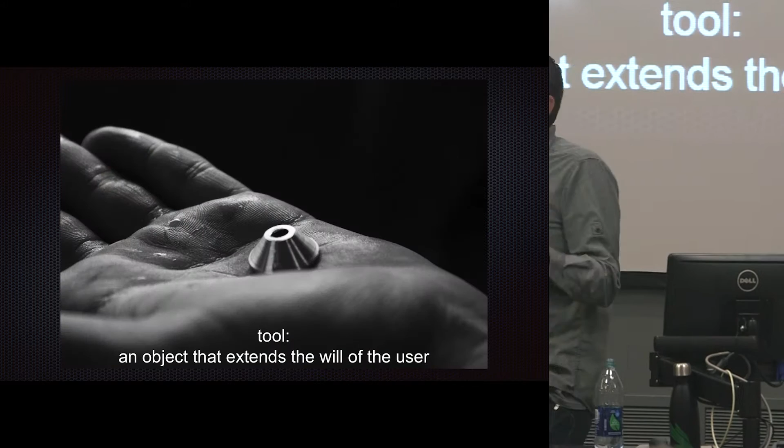Tools are one of those things, and this idea that a tool is an object that extends the will of the user. I've really been interested in how we are surrounded by objects in our daily life, and we consume objects, but yet we're very uncomfortable with making sometimes from scratch. Thinking about, from the very beginning of time, how tools have been used to perform specific tasks has been something I've been thinking about a lot.

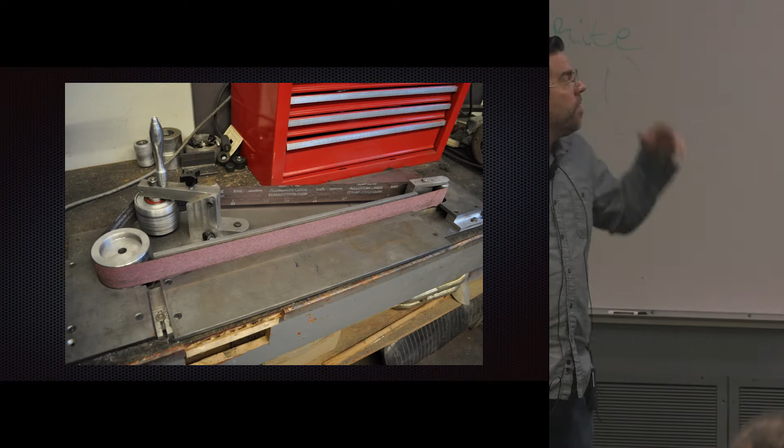This is a belt grinder that I actually created, based off photographs from another belt grinder that was online, and made it so I could sand things with this horizontal sanding belt. I frequently couple my studio practice with making tools. This is another belt grinder that I created.

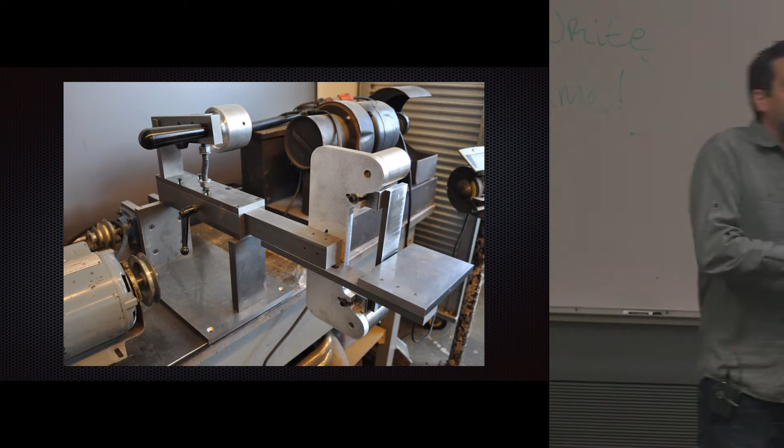Beginning at age 14, I worked full-time in the summer months and then part-time during the academic year on a factory assembly line. I worked in a factory that took raw material in and then created a product, and sometimes you didn't get to be a part of seeing what the end thing was - you were just doing a part of it. I started to realize why my dad would come home and work on things, because he started to own the means of his own production.

I was basically teaching myself how to machine, how to use machining tools, because I had encountered machining at the factory and I was intrigued by, why don't I learn about this in college, in my metals courses?

And then you had to lay on your back and thread it through all these rollers. And if you didn't thread it in the right pattern, the tape machine wouldn't work when you shoved the first box through. But it was like that episode of I Love Lucy.

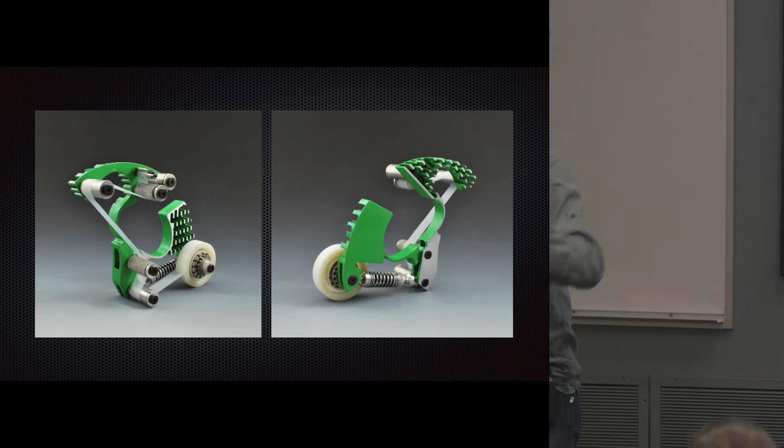When the chocolates are coming down the line and they're eating them and stuffing them, it's like that. And I was like, oh, it's so crazy.

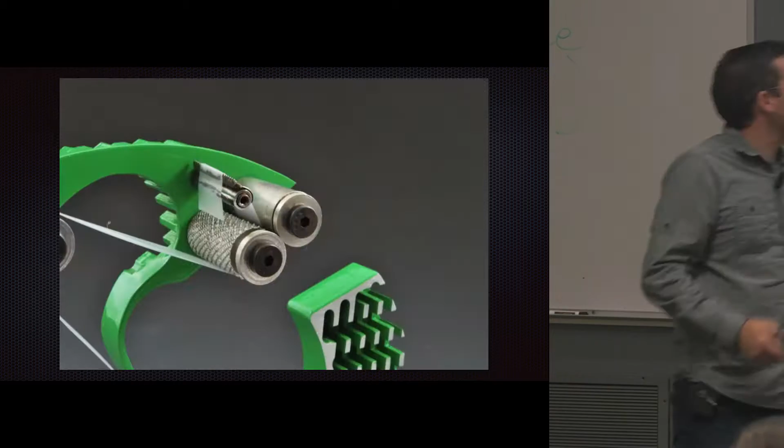And so I thought this idea of making this ridiculous piece of jewelry that also served a second function would be interesting. So I used to hang out in the factory, and I'd go over on my breaks and hang out in the machine shop, and talk to the people there and say, what do you make when you go home?

Because you've got this knowledge that is extensive in how to make things. And they'd scratch their head and go, I don't make anything when I go home, I'm just kind of living for the weekend. And I was like, wow, what a shame. But I started to understand it was because in some ways they had separated what they do during the week with what they do on the weekend.

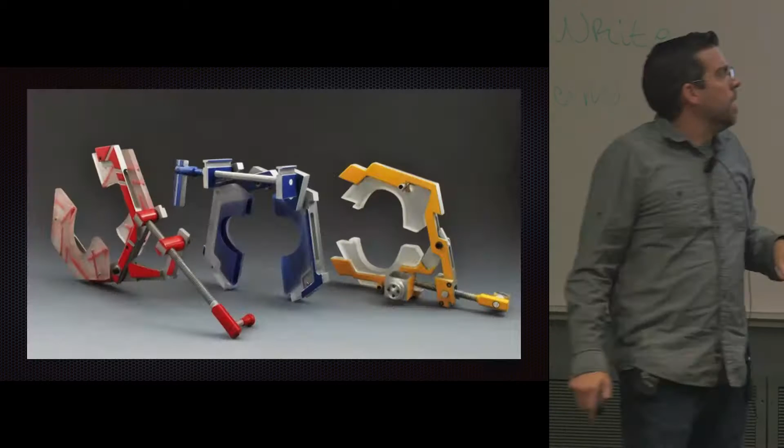So I continued to investigate these self-sizing bracelets, self-sizing jewelry, and started working with other materials like acrylic and aluminum. I was bringing home scrap aluminum from the factory and then remachining it so it didn't have all the dents and scratches, and reusing it.

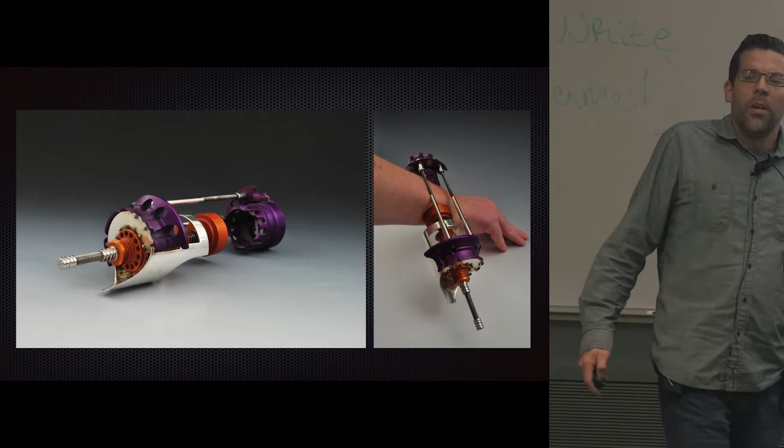And it really culminated in the creation of a lot of work where I was kind of teaching myself a new skill set and not really being reliant upon what I was being taught in class.

And I would take these pieces into the critiques, and people would say, why did you spend all that time making that thing? Why does this object have to be so involved? I couldn't explain it at the time. But eventually, working through graduate school, I was like, why are people so opposed to skill? Why do artists think that if it's skillful, it can't communicate ideas? I was really struggling with that.

That really spurred a whole idea around this: that in some ways the objects we consume are meant for impersonality. The first thing you do when you buy a new cell phone, you probably go purchase a cover, and put a few stickers on it. Or if you get a car, you usually want to put some new rims on it, or a different stereo system, to make it your own.

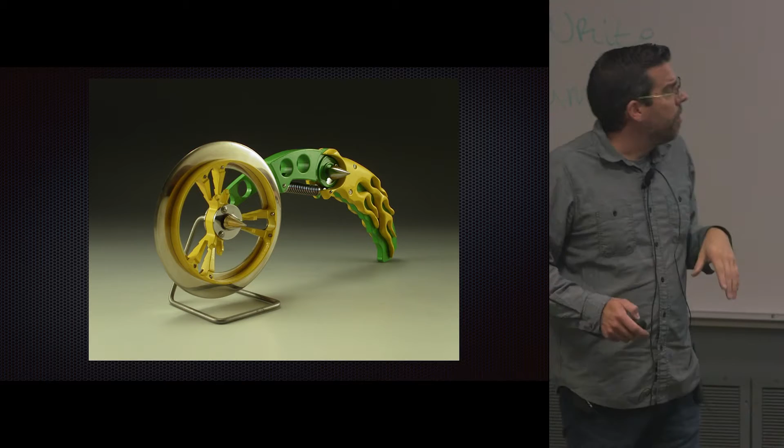This is PFL, Pizza for Life, machined out of aluminum, stainless steel. It's all manually machined. None of this is computer machined. It's literally taking a template, gluing it down on metal, and cutting it out.

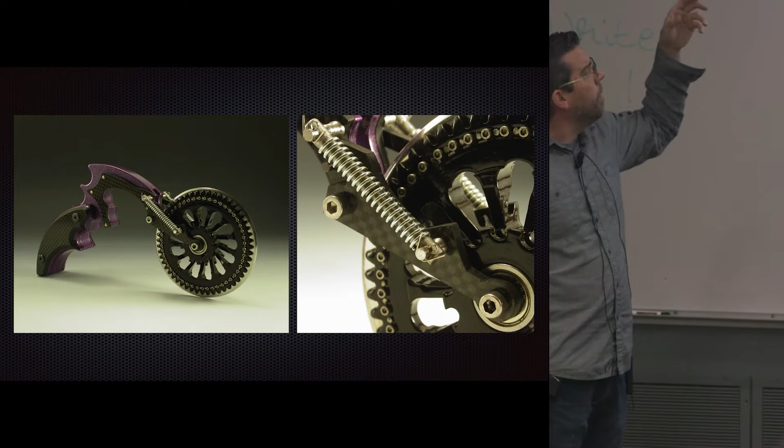And then doing some machine work on the lathe to kind of refine the form. This is Fat Boy. And again, I was really interested in using different materials like carbon fiber and powder coating, and thinking about this over-ornamentation with these like 50 micro bolts on one side and 50 micro bolts on the other to hold the blade on. And this is PFL Mantis.

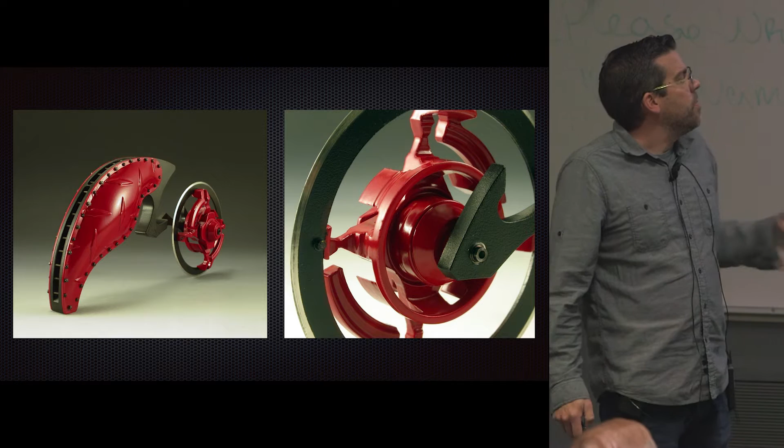And so one of the next pizza cutters I did, this is inspired by a chopper builder in Florida at the time named Billy Lane. A lot of times you'll see industrial designers especially, they'll design objects, vehicles especially, that have a hubless wheel where you can stick your hand through the wheel. And they always look amazing, right? But you never see anybody actually execute one of these designs.

But it was interesting. He took a rotor bearing, or a bearing out of a rotor of a helicopter. He started with that and decided that's going to be my rear wheel, so you could actually see right through the wheel while you're driving it down the road. And I thought, that's really cool. I'd love to make like a hubless pizza cutter.

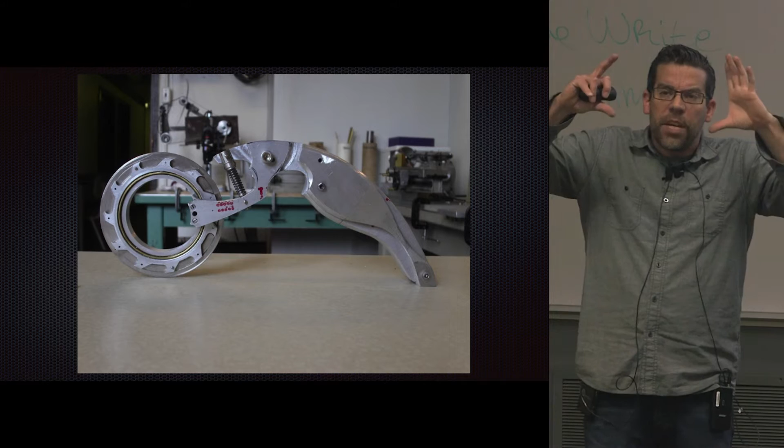And so I found this old bearing that was very thin but large diameter, and I took it apart to figure out how it worked. And then I basically measured the specs on it and reduced it down on my own in raw material to make my own bearing.

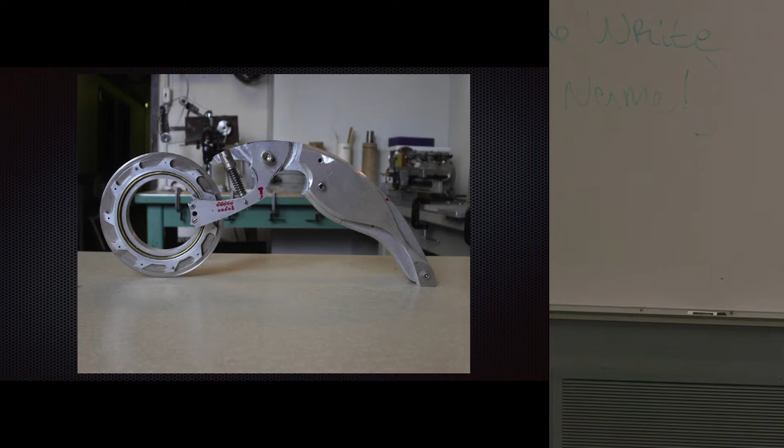So basically there's a little brass ring, and you pop that brass retaining ring, and then you can slide all the bearings on one side, and the inner and the outer race fall apart. And so that became Psycho Pizza Cadillac.

So kind of a response to that Johnny Cash song, right? The one piece at a time brings the car home, and the lunch box. I don't know, I may be showing my age here.

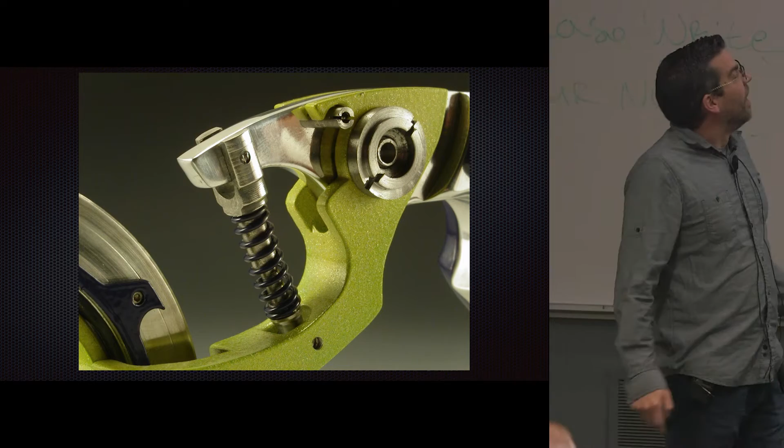So all the pizza cutters have these suspensions, these shocks, and so again, just thinking about how tools and this usefulness grew out of instinct, and again this kind of smashing of conformity. I was really interested in that with the pizza cutters.

A lot of people want to come into the critiques with the pizza cutters. They say, well, you could never use it. I'm like, no, you can use it. Oh, you could never wash it. Yeah, you can wash it. You can totally wash it. But people weren't willing to accept them as functional objects. And I was like, why not? And I realized it's because they're not used to using or seeing something that's truly unique.

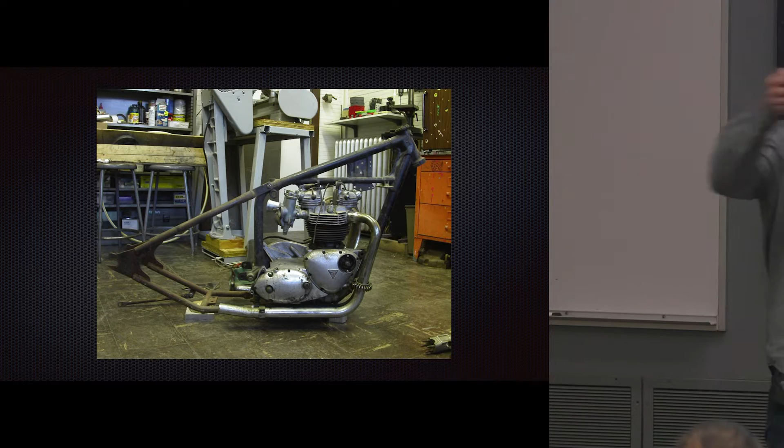So I thought, I've got to build something to go along with that. So I decided I was going to build a chopper motorcycle to kind of bring the relationship together in an exhibition. So I started off with this old Triumph motorcycle, and I made an English wheel.

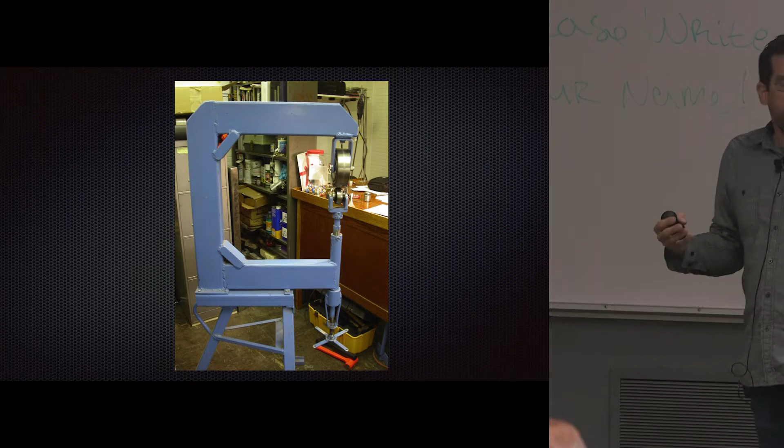This is a tool for rolling metal into compound curves. Panel beaters in England used to use these all the time to make cars. So all your old Jaguars, early Porsches in Germany were hand-hammered aluminum and then rolled to create the shape. And I made it, actually that bearing was out of an old printing press from where my dad worked.

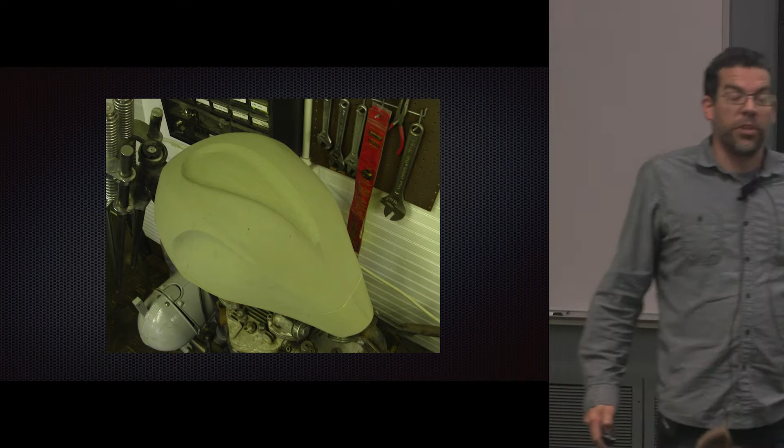And then I made a gas tank, and I took a welding class in this School of Architecture because I really wanted to learn how to weld really well. Because in sculpture it's kind of like, oh, you just stick it together, it's done, right? But I really wanted to learn all about it. So I took this class.

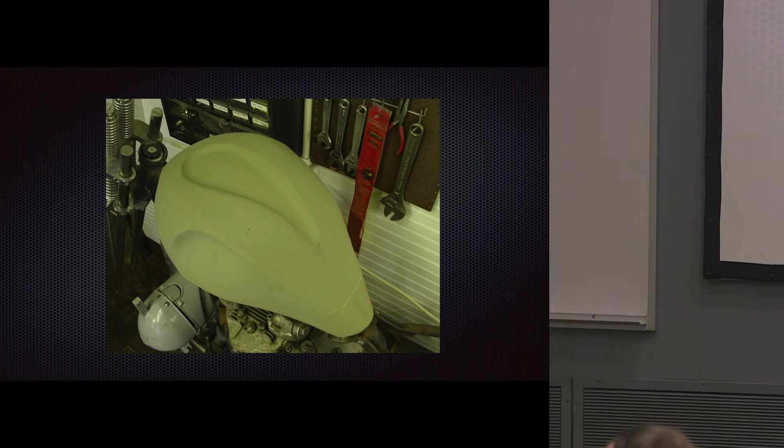I said, if I can build the tank... I think it was about this time of year that I started to build it, and my thesis show was the next semester in March. So I made a leather shot bag, turned a wooden hammer to be able to beat out the shapes, and made templates off of the tank.

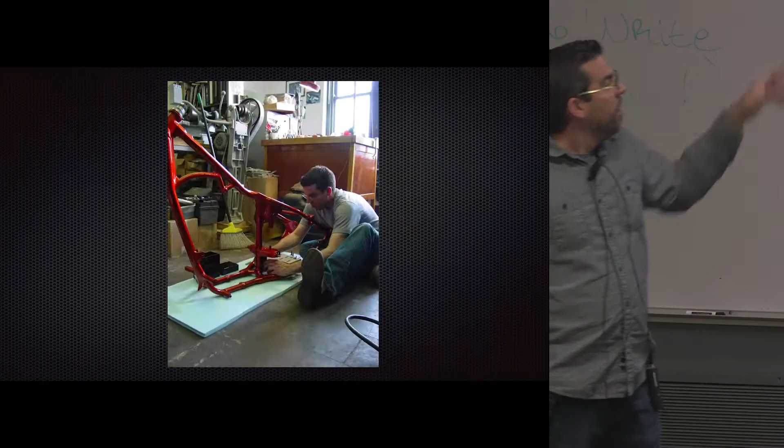I made the gas tank, and I was like, okay, I got this far, I'm going to keep going. I started making the foot pegs, built the Springer front end, the fender, the foot controls, and the pipes, and basically assembled this thing in my studio. Eventually I showed it in my thesis exhibition along with the pizza cutters.

That kind of started this idea of, okay, how do I just teach myself how to do these various things to be able to create what I want to create?

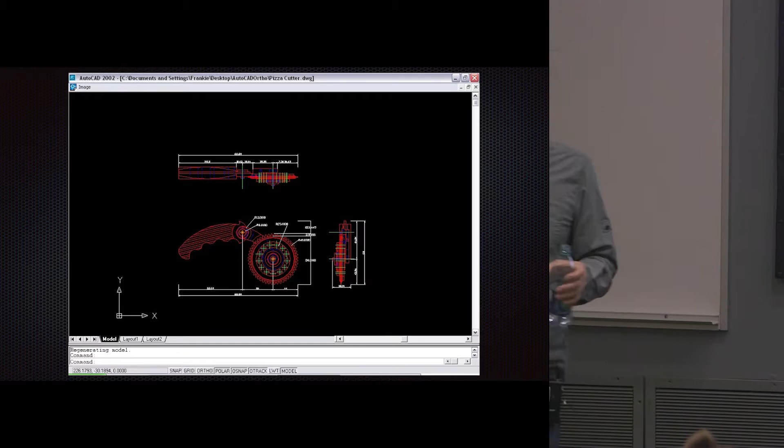While I was in graduate school, I'd taken some classes in CAD. We learned how to use AutoCAD, and I thought this would be a great tool for me to visualize what things look like before I build them. In the beginning, I was just modeling things I'd already made, and I liked that you could duplicate, copy and paste, apply materials and lighting to an object, and animate it. That was cool, and I could see how something was going to function before I built it.

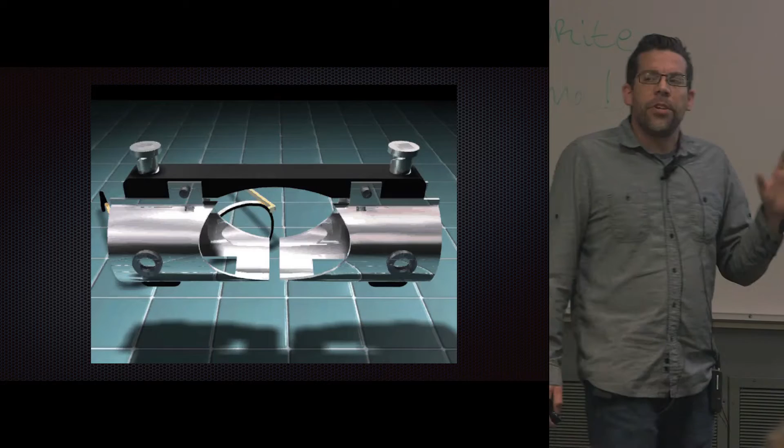I was like, okay, that could really come in handy for me to visualize things before I spend an exorbitant amount of time making them. But at the time, there wasn't much you could do with those digital files, so it went on the back burner for quite a while. I mainly used it to create templates for cutting out things.

I got a job at the University of Wisconsin, Milwaukee, teaching metals and also in foundations. I started teaching courses, and in this particular case, I always do a tattoo assignment with my students in their intro class.

I think tattoos and jewelry have similar functions throughout history in terms of what they mean: significance, commemoration, self-expression. It's a great parallel for me to pull together for students to understand the history of jewelry, because they understand tattoos.

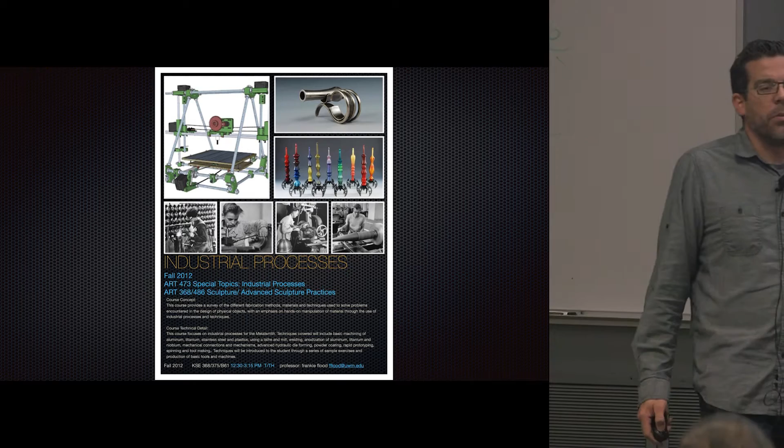You totally do. I also started teaching a class called Industrial Processes, which focused on what I do in my own work—basically take industrial processes, shrink them down to a studio level, and use it for your studio practice. So you learn how to machine on a lathe and a mill and stuff like that.

At the same time, I became really interested in creating three-dimensional forms from data. I'd gotten a little tabletop CNC milling machine, and I was going around campus pulling off the push plates you'll see on doors on institutions, bringing them back to my studio, engraving them with my machine, and then putting them back.

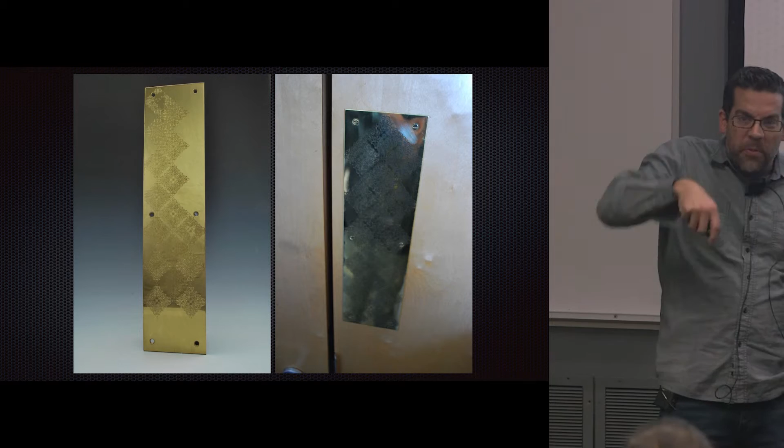I was really intrigued because in Milwaukee there were a lot of beer companies that had existed there, and they would hire metalsmiths—there was one named Cyril Colnik, and Cyril built a lot of the decorative gates and doors around the area. I thought, man, our areas are so devoid of ornamentation now. So if I can sneak a little ornamentation into the institution, that's kind of cool, and it was a fun project.

I was cutting my teeth, basically learning how to use a CNC mill at that time. And I was really starting to question what does all this mean in terms of 3D printing? What does the future mean for someone like me, who really enjoys making one-of-a-kind pieces? But what happens when you can pump out 500 of this thing in plastic? I was really struggling with it.

But I thought, I'm going to move forward. I'm going to take some of my other designs and 3D print those. And it was funny—the school at the time, I said I think we need to get into 3D printing. I'm not sure why, first of all, because it kind of goes against what I'm thinking in my own work, but I think it's important for our young people to learn this.

And they said, well, we don't see any value in it. This was many years ago. And I said, okay, well, that's fine. I said it'd be kind of cool to still introduce them to this.

So I called a local company that distributes 3D printers and laser cutters, and I said, hey, we're building a new digital fabrication lab at our school. They were like, that's great, we'd love to show you our machines. I said, oh really? Could we get them for a trial period just to test? Yeah, we can do that.

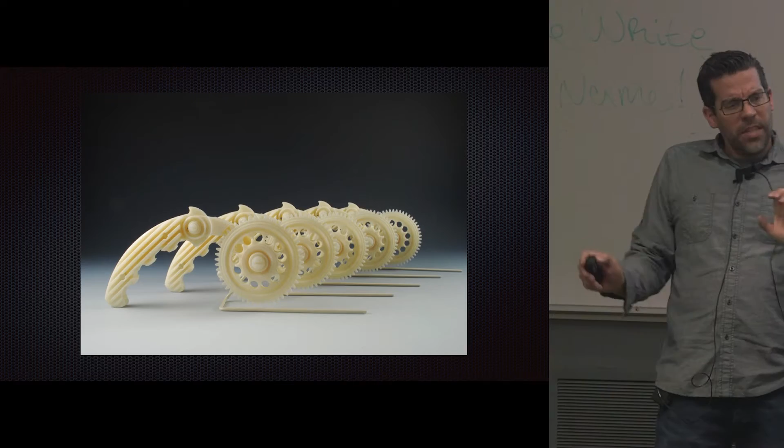And so I got to print and test these things out, and I got to make a series of this piece that I'd made before and kind of compare them, like what's the difference between this and that. And so I continued to investigate CNC machining, thinking about creating objects from data.

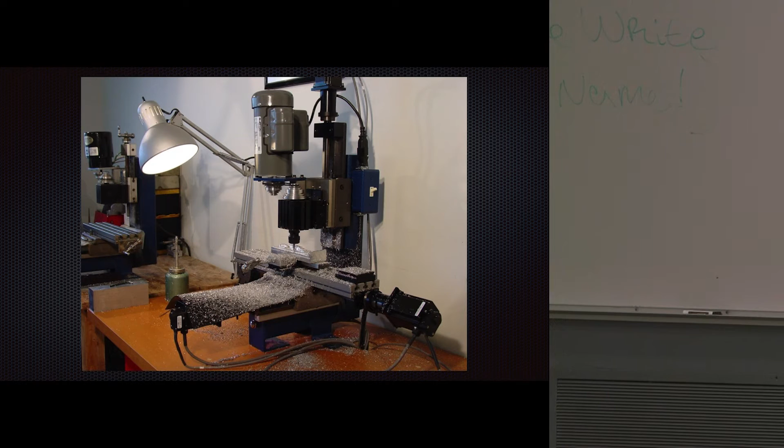So basically this is a little tabletop mill. The way it works, you put a block of material in here, and there's a cutting bit, almost like a drill press, called an end mill instead of a drill bit. The end mill subtractively carves away because the machine is controlled by motors here on the X, here on the Y, and there on the Z.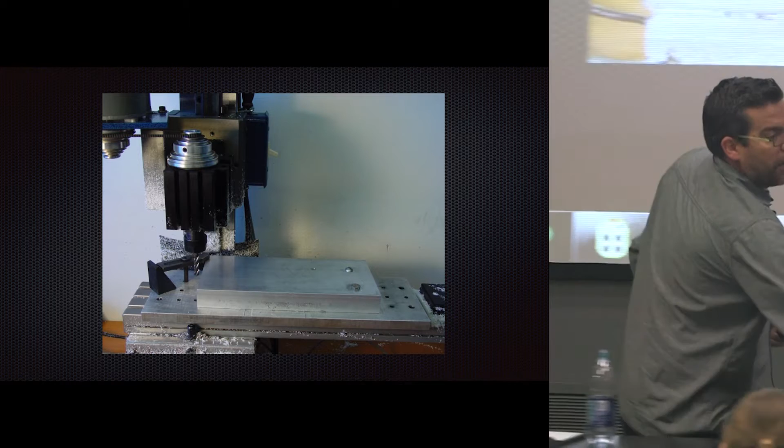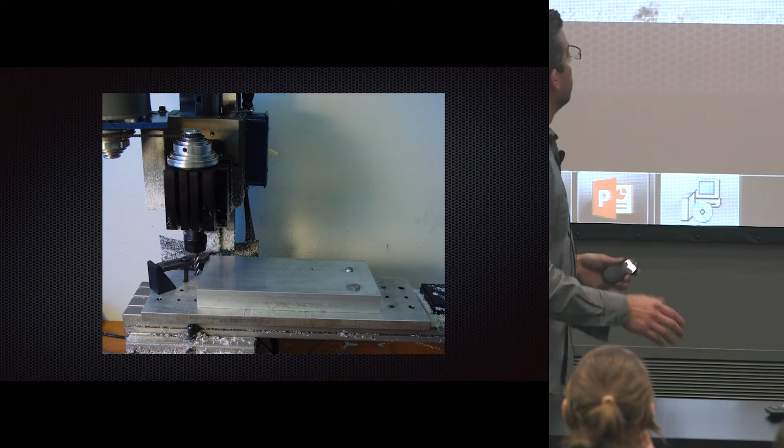So you can start with a block of material. Where's my thing? Oh. Okay. And you can take and basically subtractively carve an object, and it will reduce it down to a form.

And then I'm still using a CAD program at this time to be able to model. Let me see if this will play the video. So there's a program I use that's a CAM program, and it shows you what it's like to model an object, and then you actually subtractively carve it.

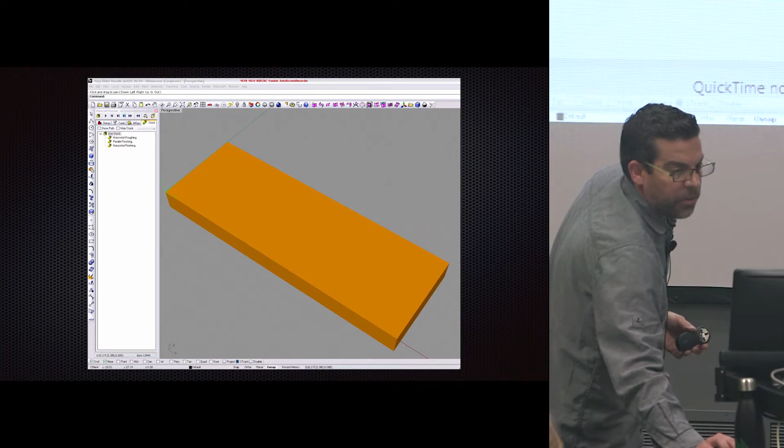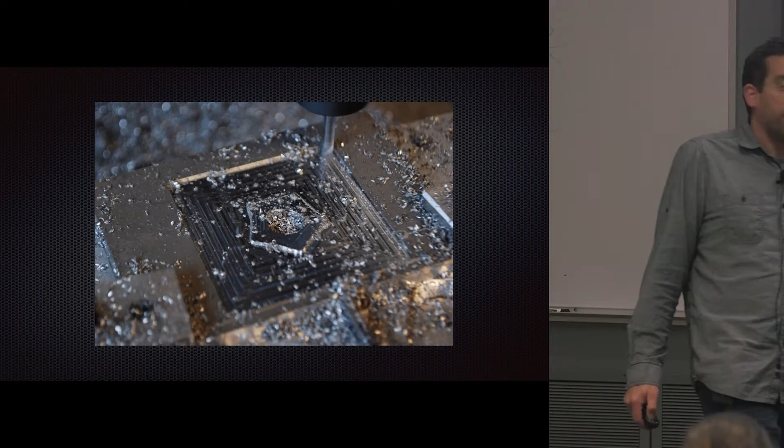It's not showing up, but that's okay, we'll go ahead and move forward. So I started off machining in pink foam, which allowed me to test things out, and I could also later cast from that if I wanted to. But basically the idea is you're subtractively carving this object, reducing it down almost like tiers of a cake, and then refining the form.

Eventually that form winds up as the wheel for a pizza cutter. And then I can anodize it and start to make multiples, but I could also just use surfacing techniques, like anodizing in this case, to change how one looks versus the other. And I continue to do a lot of commission work as well. I get a lot of requests for pizza cutters, and it really, in some ways, allows me to keep exploring materials and process.

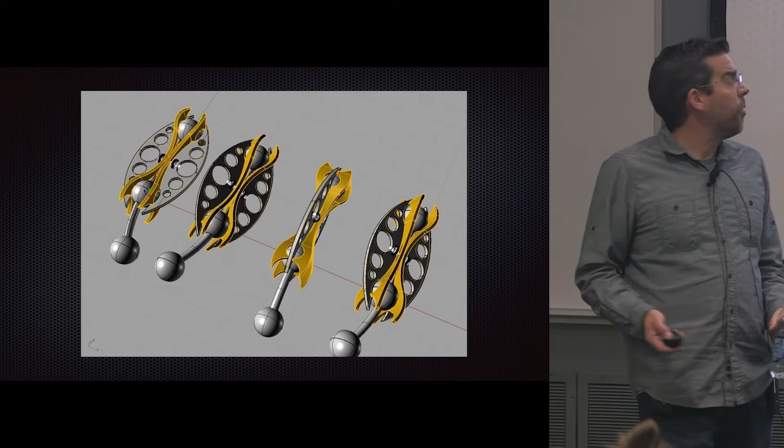As I was working at UWM, I got asked to do a Chancellor's Medallion. And this was a case where I really started to use what I'd learned in CAD. So I could go in and talk to him. I said, do you like this link style, or do you like that link style, or do you like this link style? And he was able to visualize it.

And I started to realize, wow, this is really important for my students, because they can use this as a tool to communicate with a client and say, hey, this is what I can do, this is what I can make.

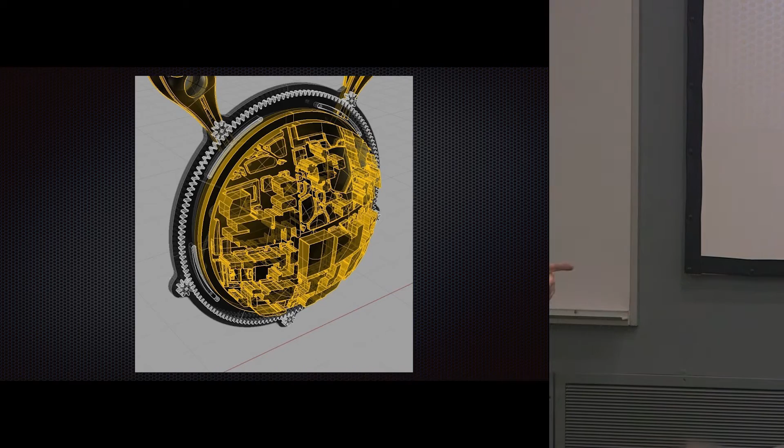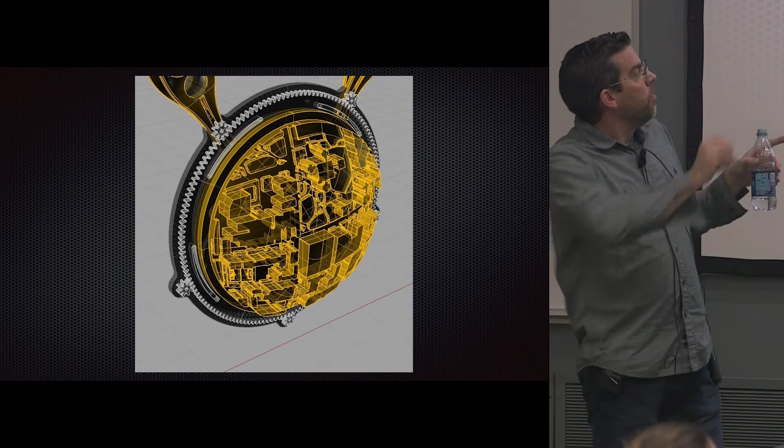So this actually, there's a map of campus, a three-dimensional map of campus, extruded from the map you get when you visit a school. Basically you rotate this map, and then it turns this iris on the back of the piece that says UWM, and it reveals the chancellor's name on the inside. So I worked on this project, and we machined in wax the medallion form on my milling machine, and we machined a lot of components.

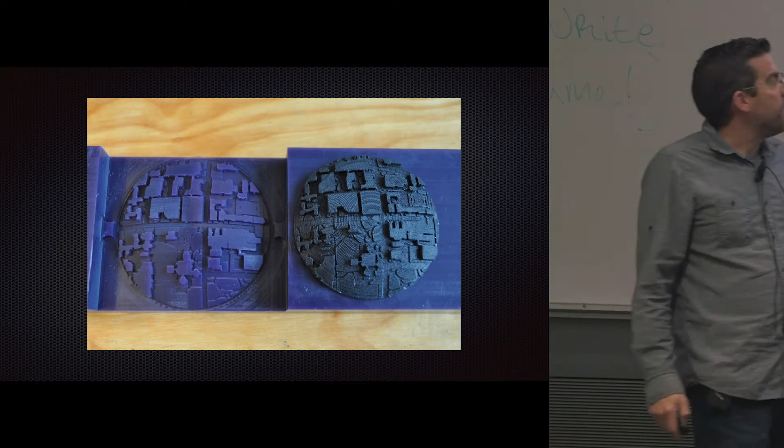We also 3D printed just to test, but the resolution wasn't good enough for my liking. But then we were able to really visualize all these components and bring together the design. It's probably 20-some pieces in just the medallion.

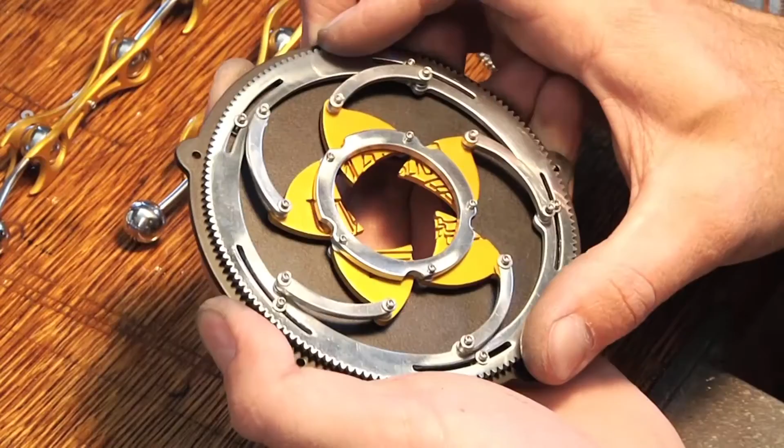And that's not counting all the little bolts and nuts. Each chain link has close to 7 or 8 pieces. Yeah, there's a lot of pieces.

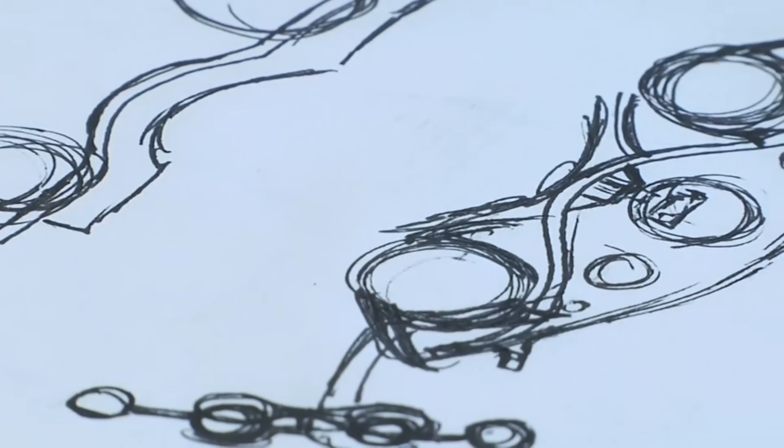From the get-go, it was really important to us to get away from antiquated, traditionalist ceremonial objects that really have no relevance. We had lots of sketches, heaps of ideas that ranged from literally making a video of a fake medallion in 3D and then hanging a video screen off of his neck.

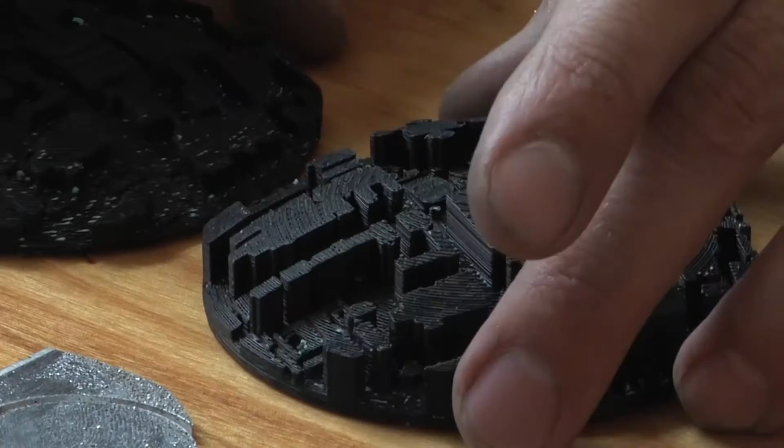How can we use current technology to actually make the piece and represent what we're doing at UWM? At one point we realized the campus map could actually be pretty interesting, and there's a lot we could do with it rather than just a snow globe model city. We could really stylize it.

Working originally from the same map you'd get in a student brochure, we created this little 3D world. So here you could see Maryland Avenue, this would be the Union, this would be Engelmann Field here.

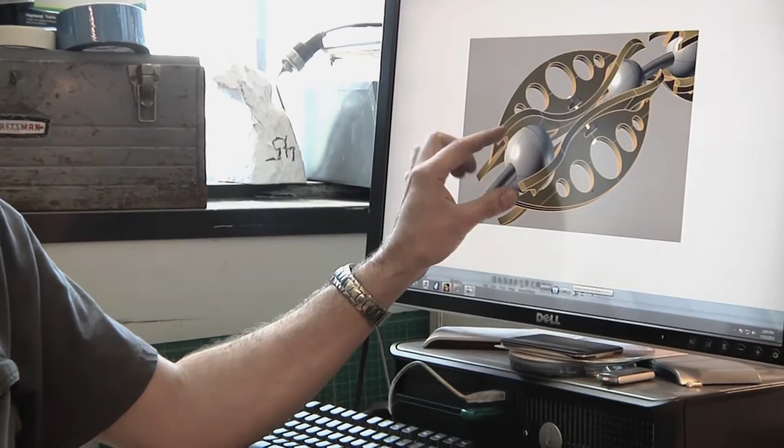The inspiration for this was taken from ball bearings, actually. We were looking a lot at the history of Milwaukee with industry, and how bearings and heavy machinery and gears really played a huge role in Milwaukee's future as an industrial city.

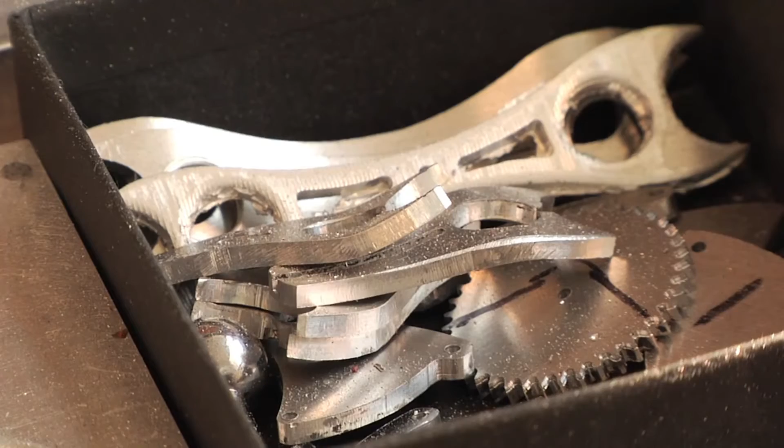We're embracing industrial technology, taking the processes of an industry and applying it to this kind of art object. We're also using industrial materials - we're not working with gold, we're working with aluminum and brass. We're working with cheaper materials, but those are materials you'd typically see in industry.

Basically everything will be cut out with this machine or a larger CNC machine. A lot of people have this misconception that when it comes off of here, it's done - like the machine does it all for you. It doesn't. It's merely a step in the process.

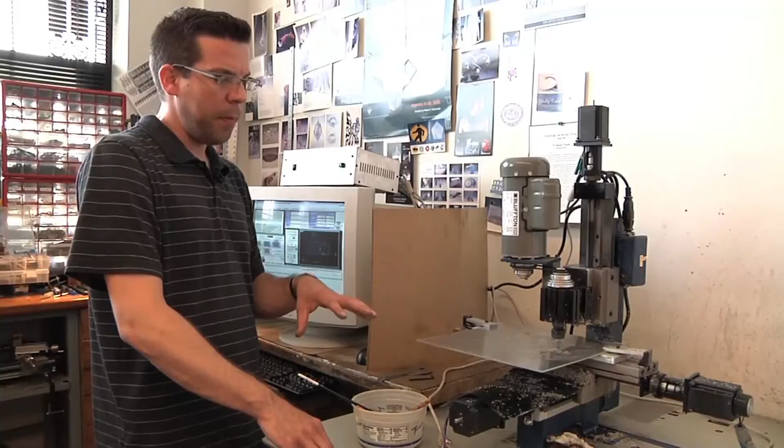The three-dimensional map of campus that Brian modeled is probably going to be the most time-consuming because it's the most detailed. So we're going to cut it in wax and actually cast it.

Actually, it was all Mike's idea. I think it was in his head that, well, there's no medallion, the art faculty has to do it, of course. Jewelry has this capacity to communicate ideas about the wearer, so we really wanted to make sure to make it very specific to this university and this chancellor.

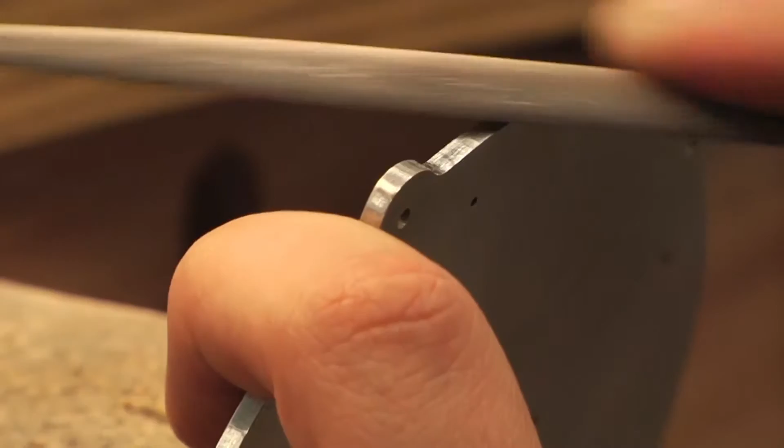And speaking of the chancellor, his own PhD was actually advanced research on ball bearings. So having ball bearings as part of the chain as he's wearing it, to me, is a nice touch - a nice personal touch.

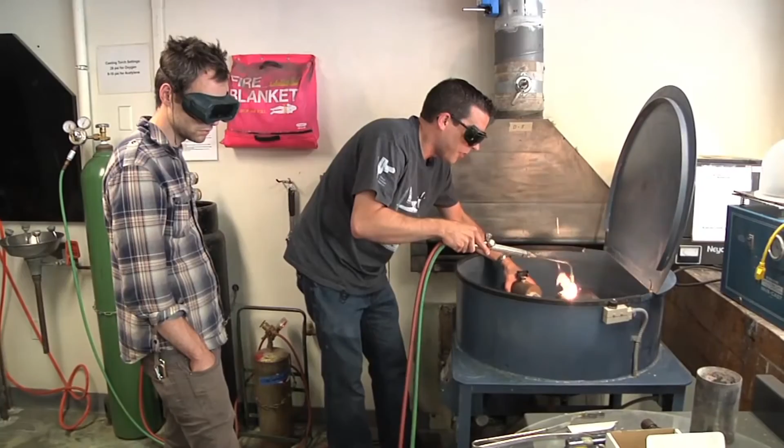Right now I'm just melting aluminum in a crucible, and we're getting it molten. You can see how fluid the metal is, really moving.

You can see the machining lines in that. We've got a lot of flashing here, but that's essentially the map of campus, right? It's not as nice as we'd hoped, but we got the detail we wanted, so it'll be workable.

This is a big deal for me, to work on this before I've even graduated. I think that's pretty cool. I like that I can be a part of it, I think that's pretty awesome.

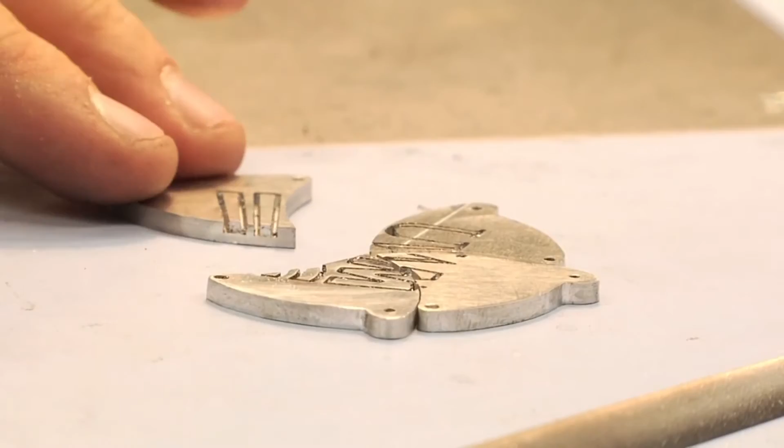You guys have been working really hard on getting these things together and soldered and polished over the last couple of weeks, so it's coming together, thanks.

I can see that he's gonna have a smile on his face when he puts it on. The students being a part of that, that's probably one of the best parts, because you see them, they're so excited in it. It's about being able to be a part of it.

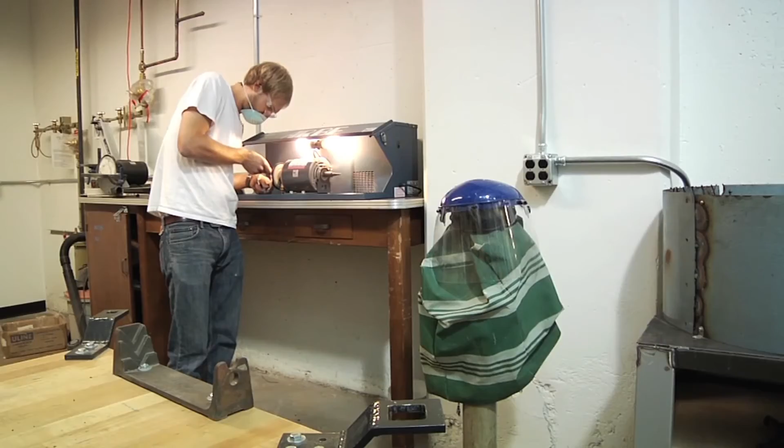The students have just polished these, and we're gonna run them through a process called anodizing, where we actually open up the pores of the aluminum so that it can accept dye, and that will give them their final color. It's gonna really pop. Excited.

I think there's so much actual thought that went into the medallion. That's what, as an artist and designer, I appreciate - all the minuscule aspects and the ideas that went into it. The students that we're educating are going to shape the future of the city, and so the medallion, to me, represents that, because we are using technology and techniques that are not typical for this type of piece.

I think just the opportunity for people who are at this university at this time to have input and actually design and make this object, I thought was really terrific.

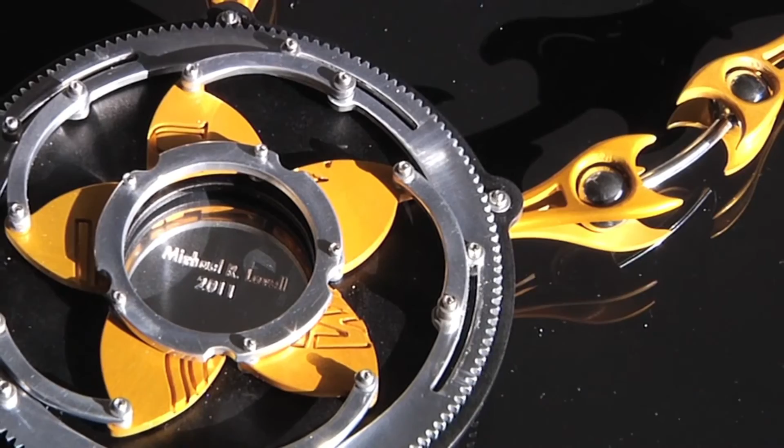We've been working on it for about 4 months. We wound up with around 86 parts in the chain, and we have probably over 120 in the medallion. We have probably close to 1,000 hours total, quite a bit of time. Probably one of the most involved and sophisticated pieces that I've made, so I hope it's everything that he expected, and maybe some more.

So I had to try it out before I gave it to him. So this was a fun project to work on.

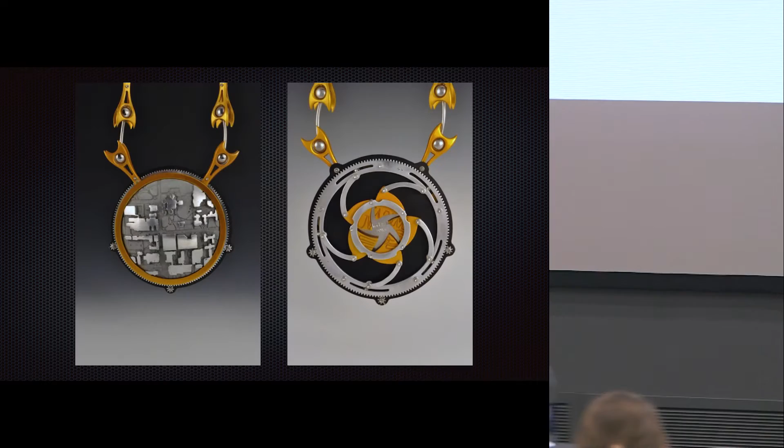One of the things that was probably most impactful was actually attending the ceremony. I talked to my students a lot about the power of jewelry, about the power of the things we wear and use. But it wasn't until I actually saw our chancellor give a speech and talk about how that object represents the future of the university, and saw it play a major role in the ceremony as he wore it, symbolizing his step into being a chancellor - that's when it hit me. All those things I'd been preaching to my students, I saw it firsthand.

It was interesting - I designed and built that podium piece too, and then they remodeled the entire auditorium. I built all these acoustic covers for the floor when they put in new seating. It was a crazy summer leading up to that.

Since then, the chancellor has asked me to do several gifts. These are actually given out to donors who donate $1 million to the university, and they're 3D printed in metal. So I took that design and actually created that.

I took some of the early CAD drawings and transferred those to a laser cutter so I could engrave them in black corian, then fill it with gold ink and peel that back to get that result. I also laser engrave gift boxes with the chancellor's logo on the outside. I made 10 of these to give out to donors, and they've all been given away.

While I was doing this work, I was really thinking about this idea of the Digital Craft Research Lab - a place where people go to collaborate and work on ideas, people from different backgrounds: engineering, health sciences, art, design.

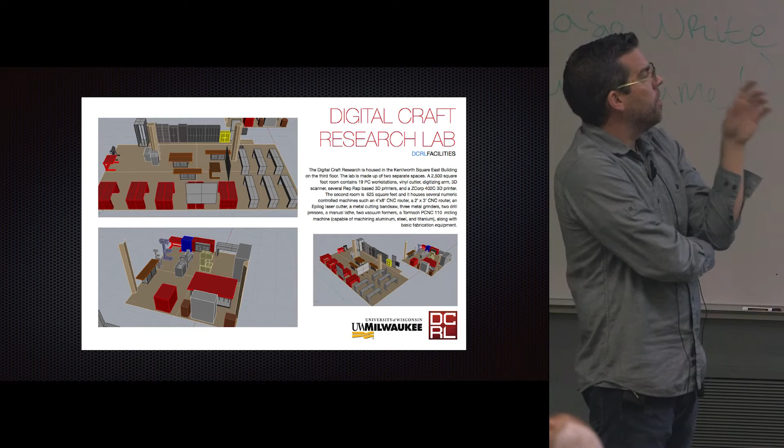I started building it through the support of a local foundation in Milwaukee, and I was able to build this lab called the Digital Craft Research Lab. It's made up of 2 rooms - one with a computer lab, modeling tools, and workspaces, benches - a dirty space - and then across the hall another space that contains tools and equipment.

I started building this lab because we had a very small budget, and I said I'm going to use the same approach I do in my own studio - I'm going to build the tools myself. So I built the CNC router with the help of one of my graduate students from a kit. We started building tool boards, put up a cleat system, and I slowly started building this. I'll talk more about this on Friday with a group about how it all developed, because this is kind of toward the end.

I built my own 3D printers - that's something I'd been doing, but ever since the school said they weren't going to buy me printers, I said, well, I'll build my own printer then. I had built 2 or 3 printers before this one, but this became our little workhorse that I used to teach my students how to build their own printers. That printer started having children, and we started getting a little bit of support from faculty and administration when they saw some of the things we were doing.

And so I built these two large spaces. And it became such a thing that the school said we really should start a digital fabrication degree. I was a little like, I don't know how I feel about that, because to me it's just, you incorporate it into wherever you need to use it. It's just a tool. Everything was technology at one time, right? That torch I use, that was technology at one time. So I was like, I got to think about that.

But we were doing things with 3D scanning. We're actually using the Xbox 360 Kinect. You guys can, if you have one of those, actually use that to 3D scan with. A lot of my graduate students, like Brian and Sarah, were kind of reaping the benefits of some of the things we were doing because they were intrigued at how to incorporate this into their work.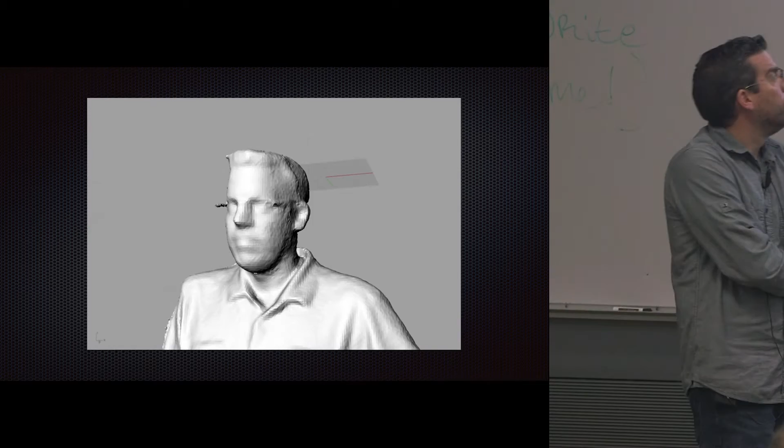I became very interested in how do we combine traditional methods with new technology, and how do we reinvigorate some of the old processes that we do with the use of technology. It wasn't that we were going to use a 3D printer and make this thing and then it ends there. It was, we're going to use this 3D printer.

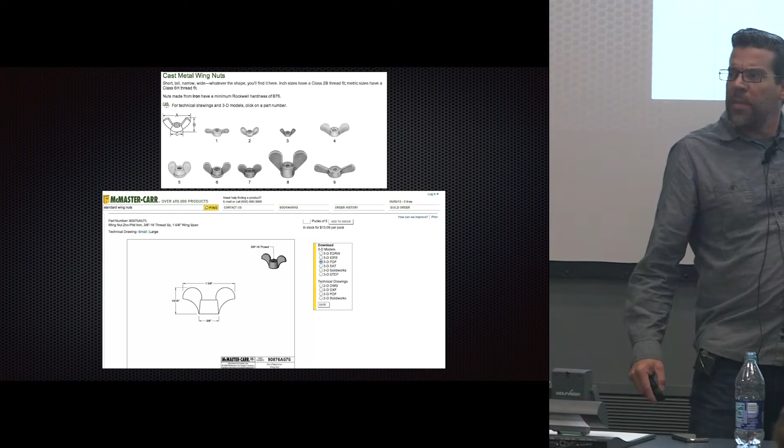This was a little Starch Z-Corp printer I bought. It's amazing. McMaster-Carr, if you don't know them, you need to check them out if you're a maker. They actually have a catalog of their parts that you can buy from, in Chicago. But they went one step farther. They make 3D models now of a lot of their parts, so you can go download a model.

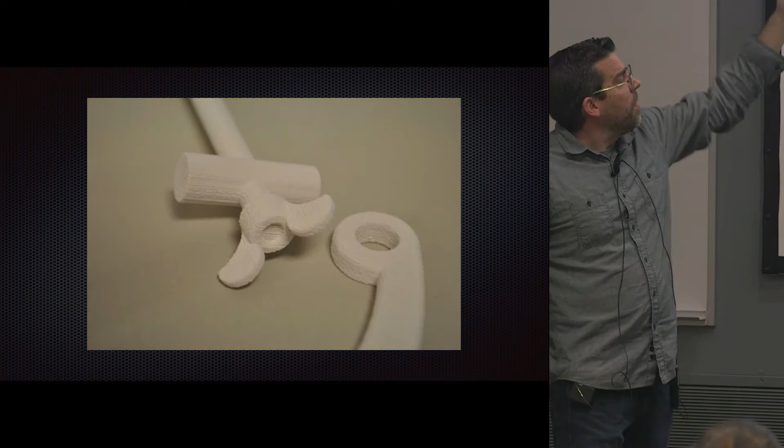And I said, yeah, I want a wing nut, right? Now, McMaster-Carr, I could have it next day if I ordered it by 5 o'clock. But if I want to go to my 3D printer, I can actually print that part I've downloaded. I could make it larger if I wanted to, print that part out in about 30, 45 minutes. I make a traditional sand mold around that part, pack it with sand, drill a hole basically for a sprue, create my button, put it back together, align it, heat my metal up, pour it in, voila, part, metal part, functional part, okay?

Probably within about an hour and a half, okay? Pretty quick, a little faster than lost wax. Quite a bit faster than lost wax. So I'm able to make this part that I want from a catalog download that I've altered, printed, and made in real material, okay.

That's the future, okay? So I still got requests for pizza cutters. I got this email, and I was like, well, that's kind of weird. Who would do that, right? And come to find out, this guy is on the show Top Chef on Bravo.

He's been on 3 seasons, I think. Mike Isabella is his name. And he's like, I opened a new restaurant in D.C. called Graffiato. I got a tattoo of your pizza cutter, part of it. And he's like, I want that pizza cutter. And I said, oh, cool, I'm going to do it, but I'm going to make it look better than what the tattoo artist did. And so I made that for him.

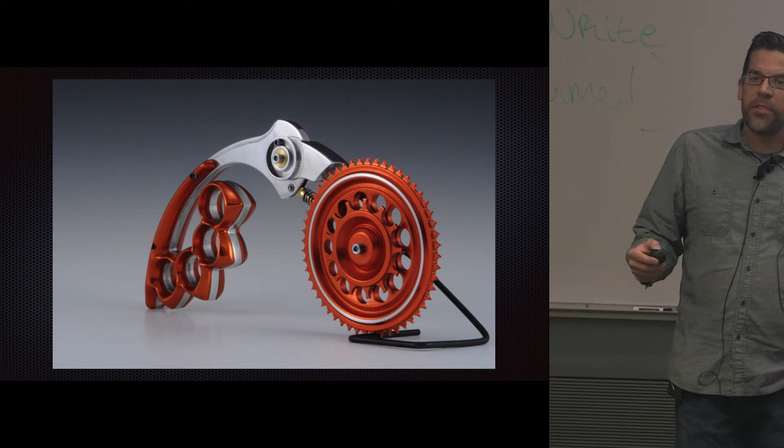So again, it's been interesting to see some of the functional objects I make, people are starting to appreciate them on that level. And then it's great to watch the show and then see his tattoo. Pretty awesome.

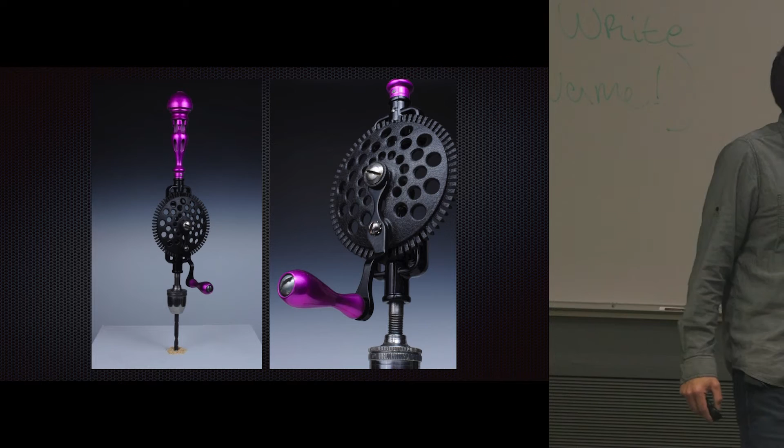I've been exploring this idea of machines that make through various low-tech and high-tech things, such as maybe a hand drill that we make, that we create, that has aura, has a unique quality to it, as well as high-tech things like these RepRap 3D printers.

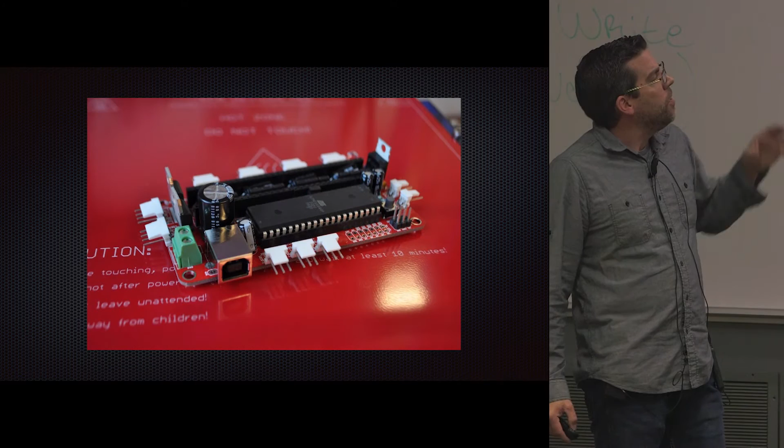And so these are some of the first printers that I built using a very basic circuit board, an Arduino or Sanguino, a heated bed, which is basically a circuit board, a hot end nozzle, which is basically a glorified hot glue gun, and you construct this thing out of basic hardware, and then you're able to create these pieces. And it prints pretty quickly.

And so I was able to produce more parts for more printers. I started going crazy building printers, just building one printer after another, and kind of letting it have children. And we make gears for it. This is one of my students, Brian Sarah, who I pictured earlier - this is one of his printers.

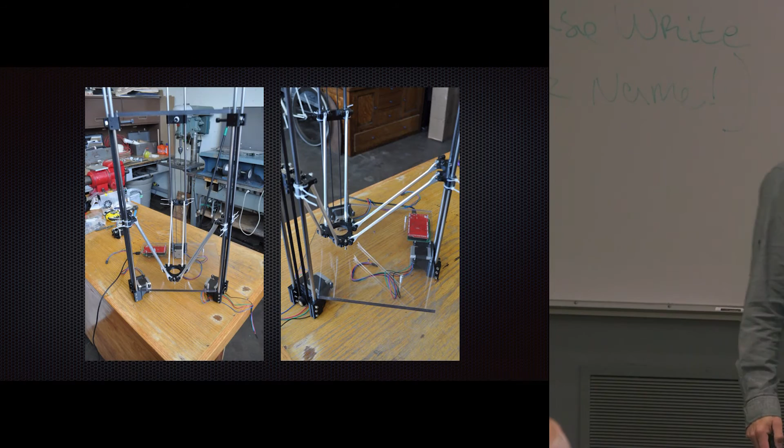So my graduate students started building printers. To me, it was empowering for students to be able to leave the school with their own machine that they can start to prototype with.

I started investigating things called Delta printers. These are basically not your typical Cartesian X, Y, and Z pattern. They're really beautiful, they almost dance when they move. So this one's just touching off on its limit switches, and it starts printing.

One of my colleagues I now work with at Appalachian State has actually converted one of these to extrude clay, so it prints in clay. He's got some beautiful objects - if you're interested, I could give you his contact information later. But it's amazing to see what people are doing where they're actually learning how the machine works to adapt it to their own needs, not letting the machine dictate what you make. So I put a pen in it - you can do drawings with it.

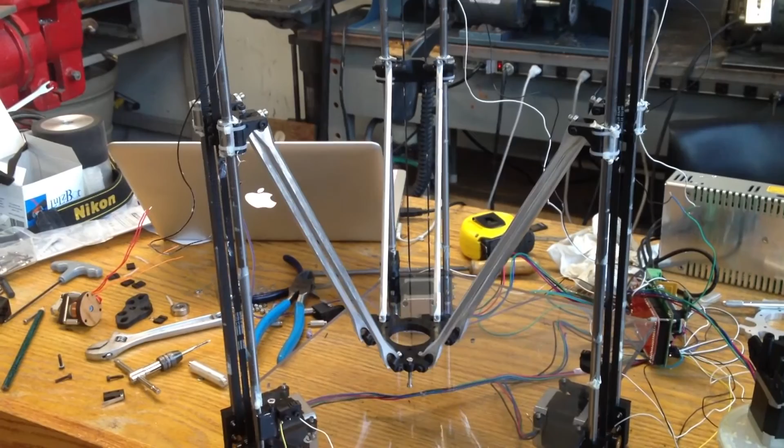So all of this is happening, and I get this request from someone that their little girl was born with no fingers, and they wanted to know if I could make a hand for her because she'd seen this video. I'm really interested in the idea that our village - like when I was a kid growing up, I lived in a small town, and when your neighbor needed something, you helped them, you loaned them something, you pitched in and shared resources. It's interesting, our village has shrunk now thanks to the internet - we live in a global village.

So I want to show this if we can. I know we're running short on time. Can you just slide your hand through there? Perfect. Can you grab my hand with it or not? Oh wow, that's pretty cool. Do it one more time. Ah, cool.

I said, I've got to do something because this is - I can help. So you want to try it out or not? Yeah? Okay. I saw all those videos of kids picking up stuff and I thought it'd be cool. That's good.

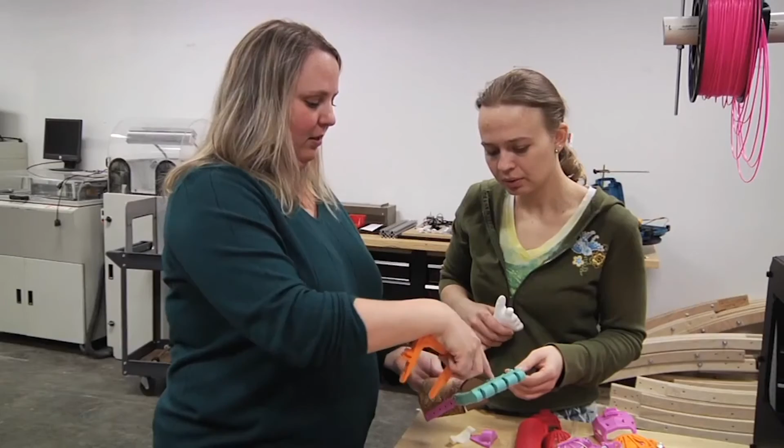And Shay and her class have come and visited our class, and we get to talk to her and interact with her, and it's really cool to see her put on the hands that we've designed and use them and really react to that. What I really want to do is streamline everything and make it so it's actually the same size as her other hand, so it feels like it fits - it's a functional part of her body.

I knew that they would come up with better ideas than I could come up with, because that's what our young people and our students do here at UWM. They come up with ideas that are grand, and that brings a richness to the project that I can't - I'm too old in some ways to do that, to have a fresh perspective.

None of the students have ever 3D printed, none. And so that entire production process is different. None of them have ever used a foam cutter. So it's a really fun thing to see them all out of their element, but willing to work together and help each other.

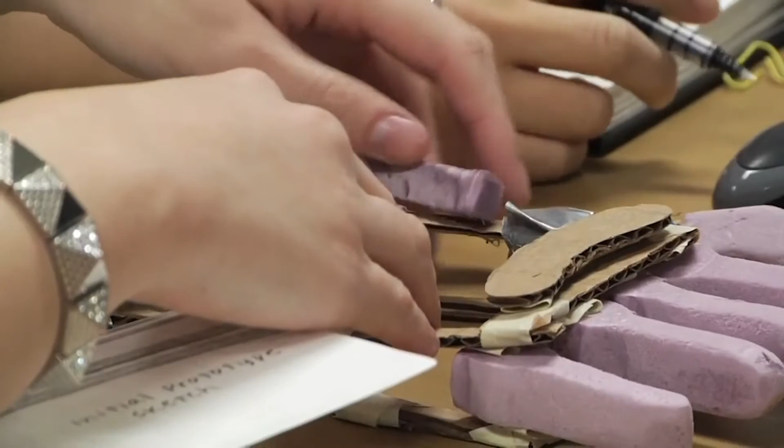There's a Google Plus community called e-NABLE, a group of right now about 400 members. So I can talk to people from around the world, and I can download the files for it. We had our students join e-NABLE, and almost immediately people who I would be intimidated to talk to at first would chime in on their sketches and their ideas. The students came in proud of the fact that they were part of this, and I think that's really empowering. I think that just that rapid pace at which we can develop and research, it's wonderful, it's marvelous.

Pull them out and stick them on the finger that you want them.

I don't think there's a lot of other kids out there who can say that they get to be a part of making their own hand and give feedback and have choices. Just seeing her joy, as a mom, that's all you want, is your kids to be happy.

Have you ever seen the laser cutter work? It's pretty fun. They're the ones that can sit here and spend hours and hours away from their family working on stuff. It's just absolutely incredible. So leaves us speechless.

Is that too tight? Are you okay? Is it okay? Okay. Yes, Frankie and I are giving them these hands, and sort of we're gifting them with our work, but I think in a real way, they are giving us the bigger gift.

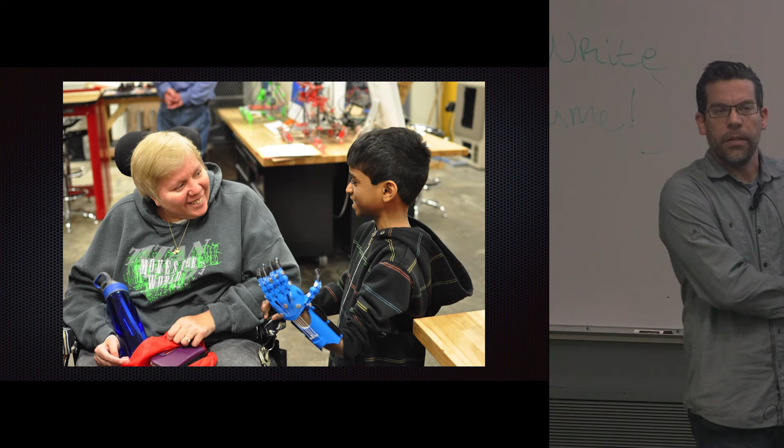This is a project where I started to realize, wow, we as artists and designers, we have the ability to synthesize material and process in a way that others really don't. And we can use those talents and those gifts, those abilities, to do something far larger than ourselves. And that's what I've been focused on lately. And so I'll leave it at that, otherwise I'll get choked up. But sorry, my goodness.

But we've made a lot of hands for other kids. And man, very strange.

This is Bella. Earlier you saw Karuna. This is Evan. Evan was actually an amputee, the first child we've helped that wasn't born with amniotic band syndrome. The video won't play, but he was in an accident and he had to have his hand amputated. So we've made a hand for him.

This came about from a couple people, Richard Van As and Ivan Owen. Ivan Owen actually later on, it was funny, we've worked together a lot, we've collaborated on different designs. This was the first design. Ivan actually became a member of e-NABLE as well, which was spawned kind of from a video that MakerBot had done. And again, e-NABLE has grown into a huge community. I'll talk more about that.

I've helped kids from as far away as Inverness that I've never met. This is Haley from Inverness. BBC did a segment on her, but she's able to use her scooter, she's able to pick up things. And again, we did this all from a drawing and a little plaster cast that she sent to me. I'm able to send her two hands back.

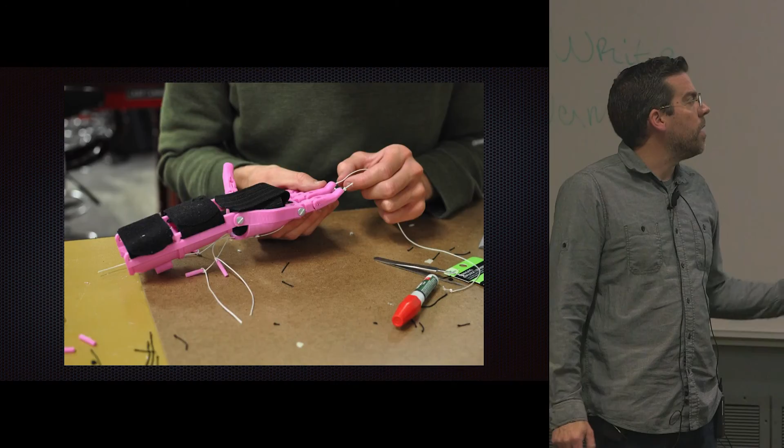I'll talk more about this. Students have gotten involved with this in my lab. We've presented this work at Johns Hopkins. I've actually collaborated with some of the other designers in the e-NABLE group to design this hand called the Raptor. We've actually sent this out to other people for them to print. And then the kids have come and we've actually helped them and their families by doing demonstrations and let them build their own hand as workshops at Johns Hopkins.

And so then they actually get to partake in making, right? Firsthand, literally, to be able to create. Sorry, that was not intended, but seriously, it's really amazing to see then the impact of that. So I'm going to leave it at that. If you're interested, later on I'll give a talk on Friday. If you have any questions, I'd love to listen. So thank you.